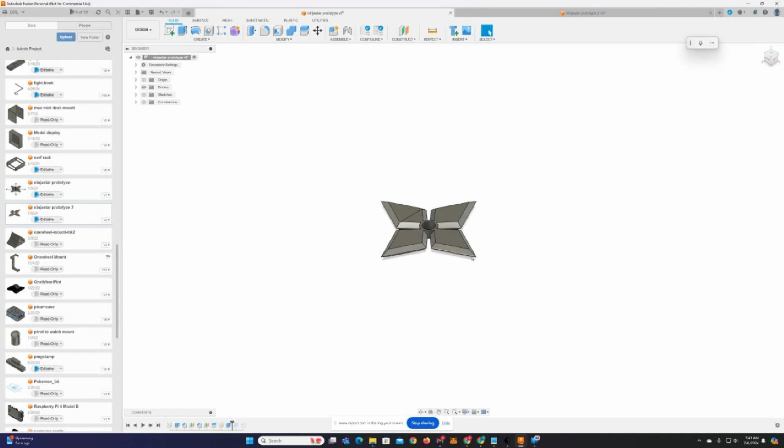Hey guys, so here's the Ninja Star shape here, and I wanted to show you how it's built so you can get an idea of how you can make your own. All of this is based on a sketch, and whether it's this one or this shape, they're both basically the same. I'll show you that.

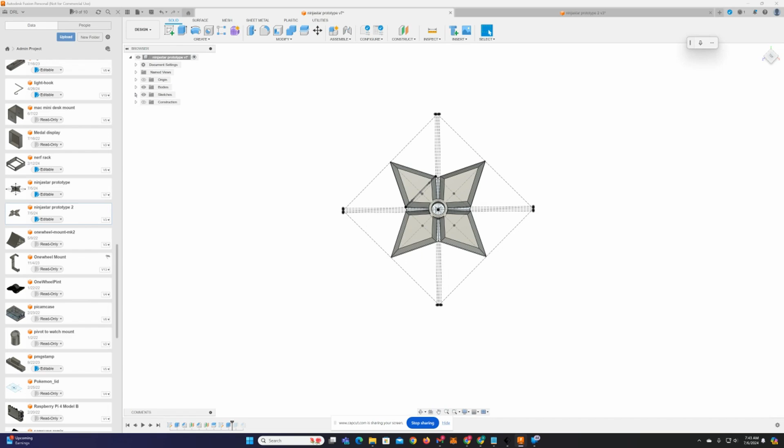So I'll go into sketches here, I'll turn the sketches on. There's two sketches we have. I have one that's the main shape, and one that's the actual holes, as you can see, for the magnet. As you can tell, the circles here are all measured out. There's a certain distance away from the edge here. This hole over here is just a mirror image of this.

So once I have this one defined, I go up to the top and use mirror, using this as the half line to mirror it on the other end. So I don't have to draw it twice, I can simply mirror it to the other side. That's the holes for the magnet basically.

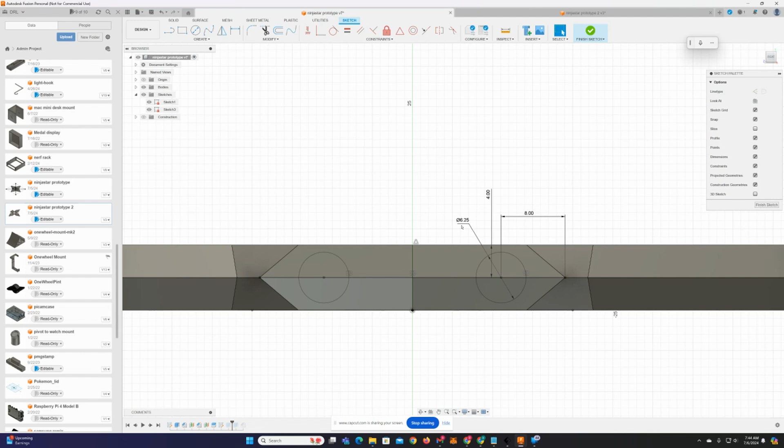And my magnets were about 6 millimeters, so I added about 0.25 millimeters as a tolerance just to make them fit. You always need to add a little bit of space so there's a little bit of wiggle room. Now I'll go ahead and show you the main shape here.

So this is the main shape, and basically what we have here, if you look at it broken down, it's a square, and these dotted lines mean they're construction lines, so they're not actually part of the drawing. They just kind of help support the drawing, either by using constraints or being tied to certain things. Everything has a measurement, so this is a fully defined sketch.

Looking at this again, I could probably draw it a number of different ways to make it a little simpler, honestly. But this works, it was kind of my first attempt at it.

So you can see here, these lines, what I've done is I got one line going in the middle, and I simply offset it two more times on either side. And what I did with those, I used them to draw a line. You can see it here, so that line goes from this edge to this edge, and that creates a taper.

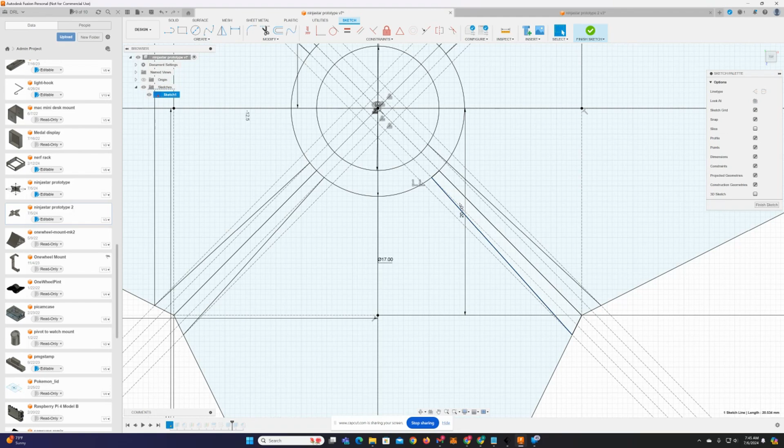You can see in the shape here, that's how I'm creating that taper. Otherwise, you'd have the line going all the way down to the end, and there'd be no gap here. If I want to have a gap, I've got to add some kind of taper.

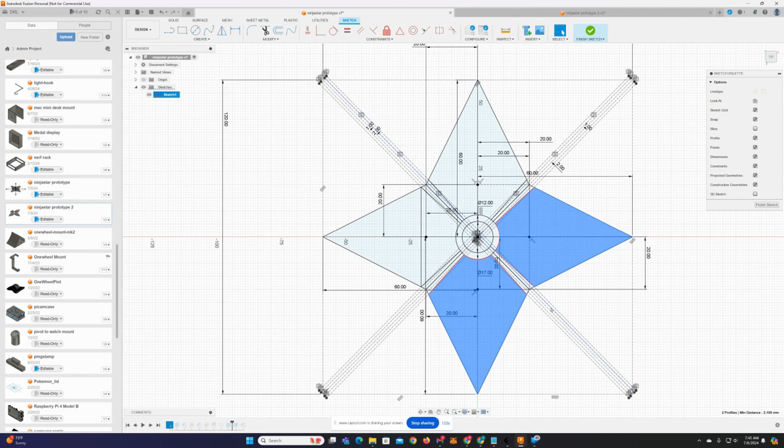Now, the other star, I'll show you. That one's very similar as well, same basic drawing. In fact, I didn't even change the lines or anything, even though I'm not using them in this one. So in this one here, same idea.

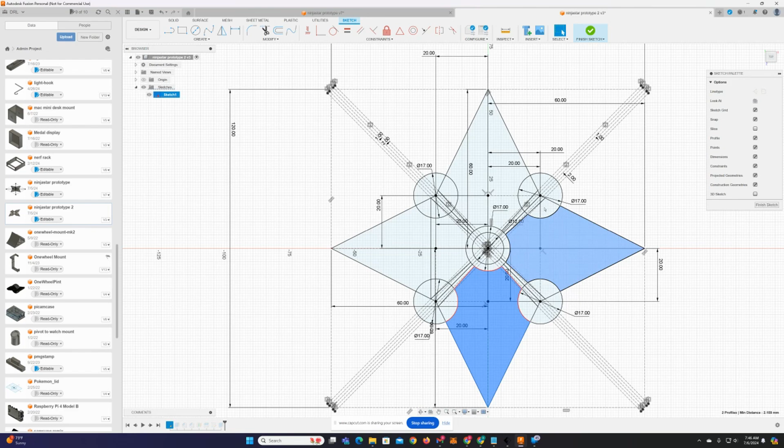The difference is we added circles. So I added a circle here, a circle here, a circle here. And then basically you're extruding out. That's where these lines would be good to get rid of in this drawing because I don't need them. But you can see that's the basic shape there.

Okay, so what I'm going to do now is I'm actually going to delete the bodies. I'm going to show you how I made them, just so you can kind of see how it works step by step here.

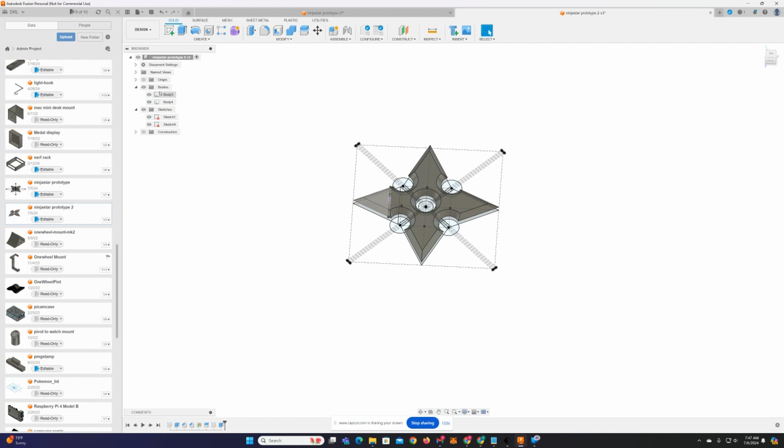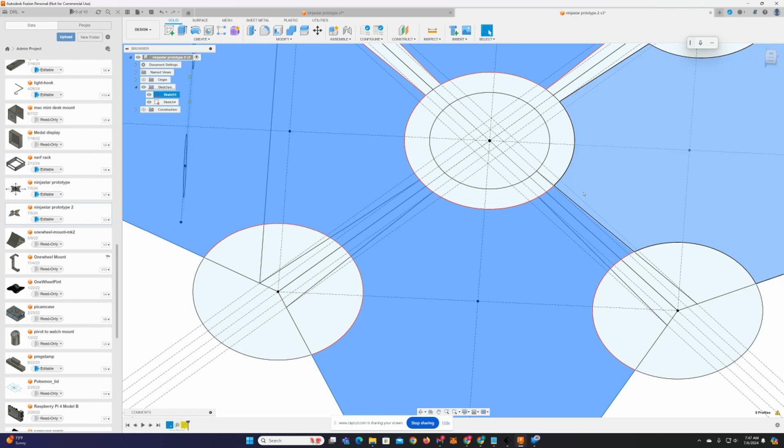Okay, so I'm back left with just the sketch at this point. What I'm going to do is select these pieces that I want to extrude out. This drawing has some extra lines in it that I probably wouldn't have for this version if I was just going to do this. Since I did 2 versions though, it was just simpler to use the same sketch on everything basically.

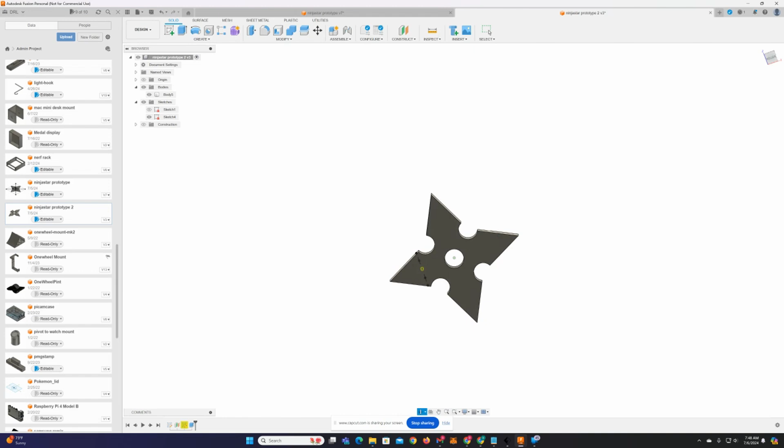Okay, so I have this shape now, and I'm going to go ahead and extrude out. I'm going to do 8 millimeters. And I'm left with this shape here, which looks very similar to what we wanted, but we're not quite there yet. So the next step is to add on a chamfer, which is right here.

So if I go into here, you want to choose all the edges. There's a number of different ways to do this, but I want to chamfer on both ends. So I'm going to go ahead and choose all my angles here, including the curved angles, as you can see. So I'm grabbing all the angles. Not these angles there, I don't want to get the corners.

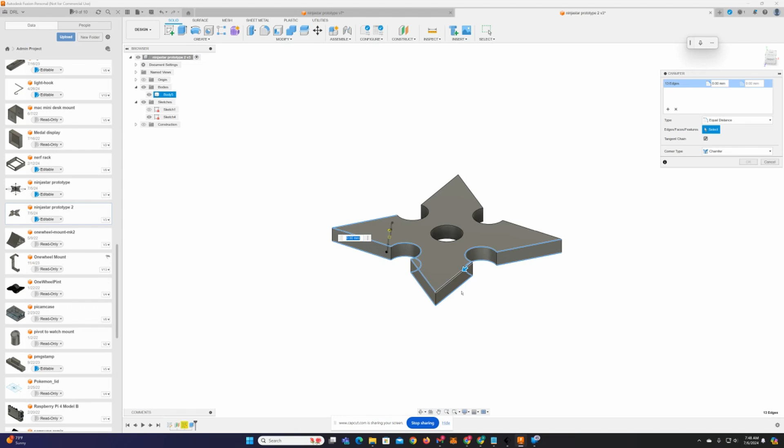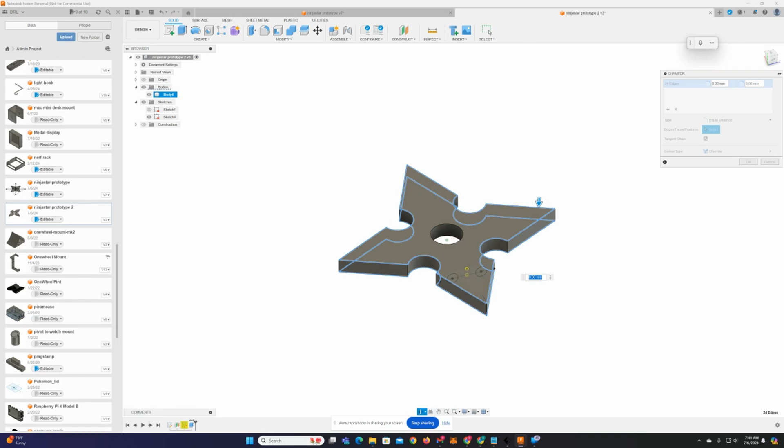If you grab too many angles, you might end up with problems in your geometry. So you gotta make sure that everything works okay. So it looks like I've got all the different sides here, and I'm gonna go ahead and add a 4 millimeter chamfer. And you can see that basically makes both sides in like that.

Now, what I did forget on this one here, I didn't do the inside. So let me go back in and redo that here. Do a 4mm on that too, and there you go.

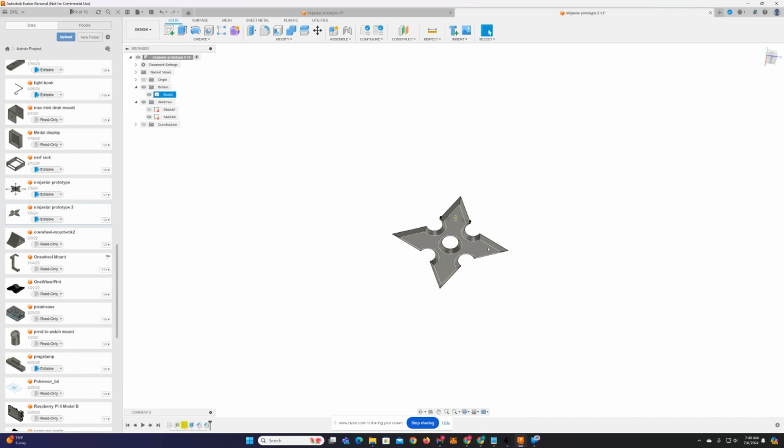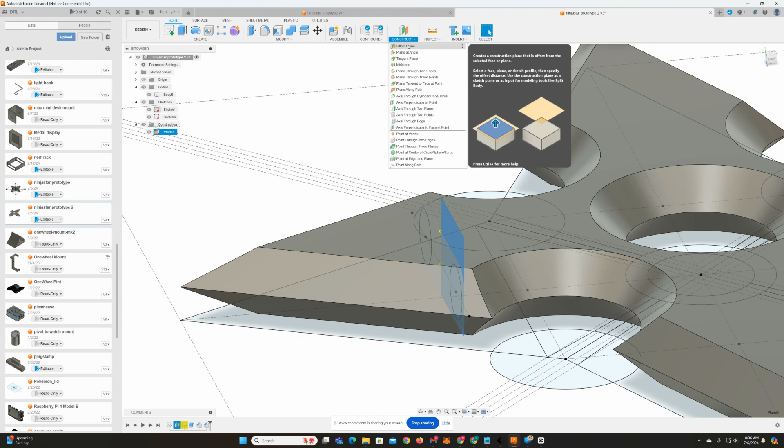Okay, so once we have the shape here, the only thing left to do on this one is to actually split it. Now you can see on my version here, I've already got the holes there, and that's because I have these construction lines. So what I did is I used an offset plane, and that is what I used to cut this model basically.

So you can see the offset planes right here. Now, right now in this model, since I redrew it, it's not cut anymore, as you can tell. But my offset plane is still in this drawing. So I'll show you how I split the model.

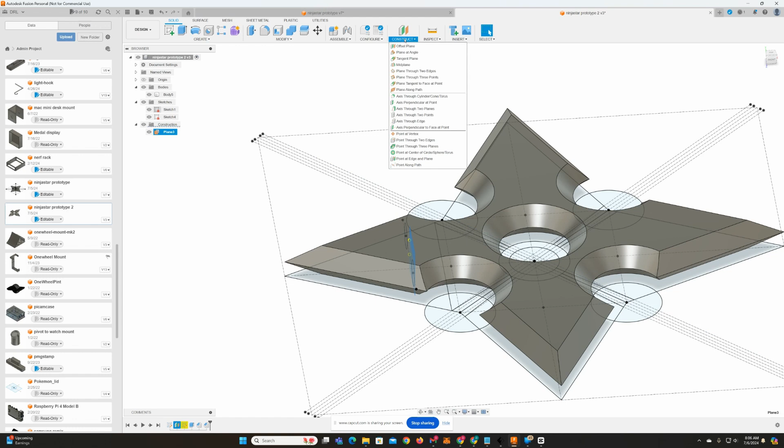With an offset plane, basically you go up to here, you add an offset plane, and then from any of these axes, you can expand out and put it wherever you'd like, basically, okay? So how to split this body: if you go to modify, you're gonna do split body.

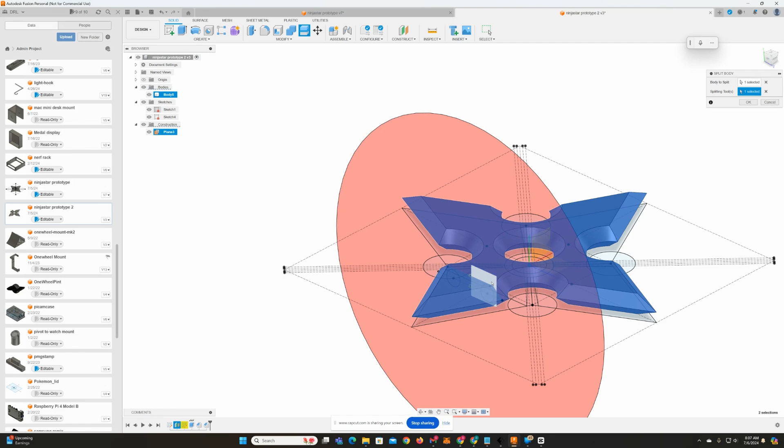We're gonna choose our main body here, and then for the splitting tool, I'm gonna choose the offset. See, that creates a cutting tool there. And again, hit okay, and that's gonna split my body. So now I've got two bodies up here.

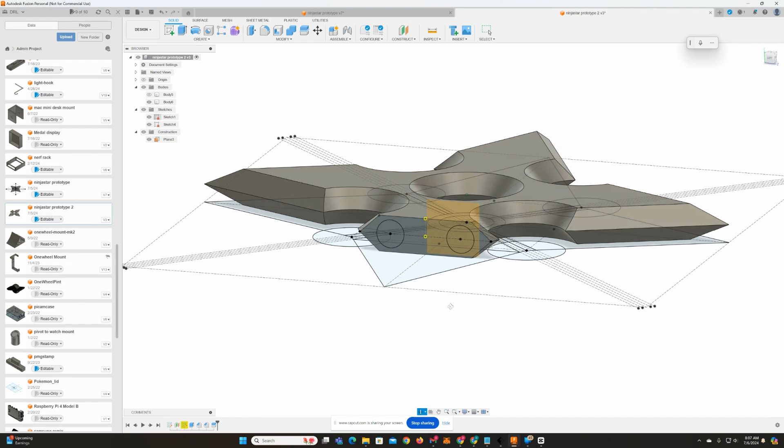And if I take one out, you can see that there is the spot where the magnets go. Now, once I have this spot here, these two pieces, I'm gonna go ahead and hide the construction deal here. I can extrude, and I'm gonna be cutting in 2mm, and that makes my holes.

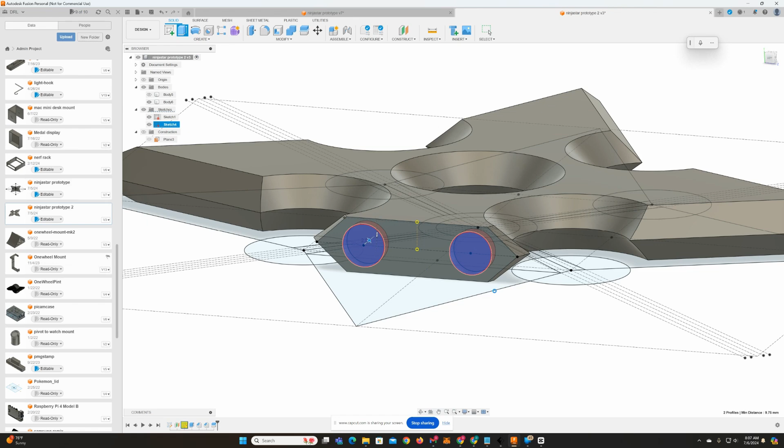So that's the construction ninja star. And you could draw any kind of shape you wanted to. So you could change this sketch and make more points on the star. All kinds of possibilities here.